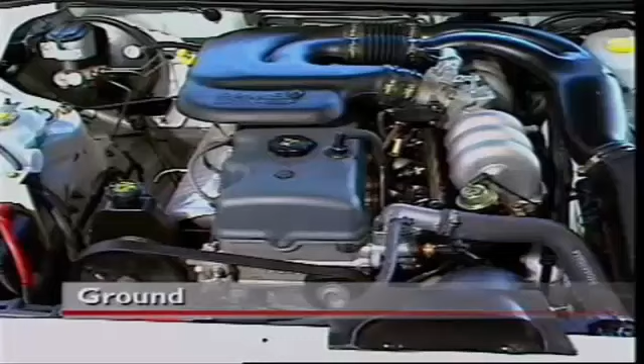Ground is a term used to indicate connecting a component to the vehicle frame or chassis. Current flows from the positive terminal of the battery through a controlling device such as a switch, then through the component. The return path is through the vehicle chassis or frame to complete the circuit and allow the component to operate. Using the vehicle frame in this way simplifies the circuit wiring.

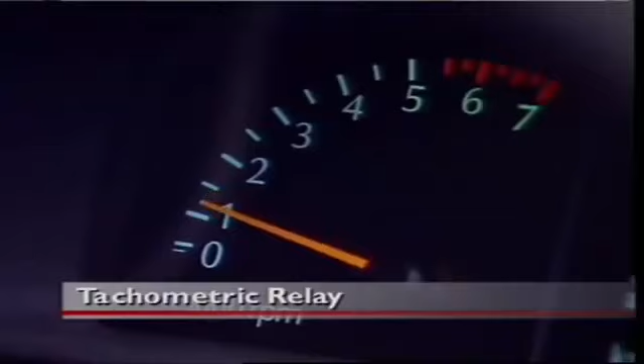A tachometer is used to indicate engine RPM. It is normally connected to the negative terminal of the ignition coil. The pulses from the ignition primary circuit are then used as an input to operate the tachometer. At idle speed, the frequency of the pulse is steady. As the engine speed rises, the frequency of the pulse increases as the tachometer indicates.

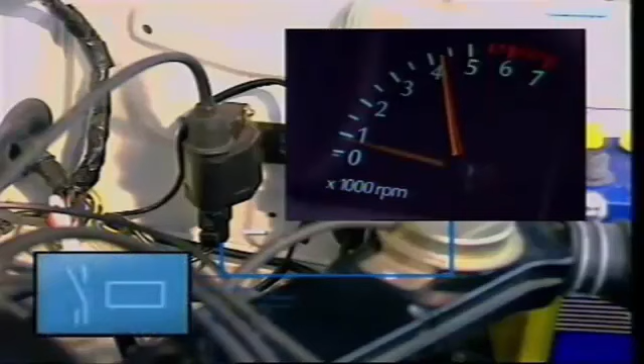A tachometric relay uses the same input from the negative side of the ignition coil to ensure the relay operates only when the engine speed is above a specified minimum, say 350 RPM. In this case, it operates as a safety device, ensuring the fuel pump operates only when the engine speed exceeds this figure.

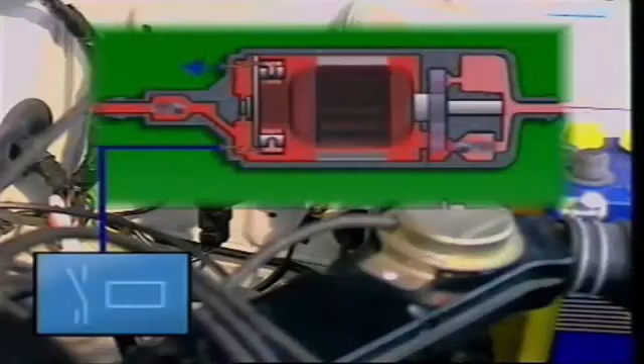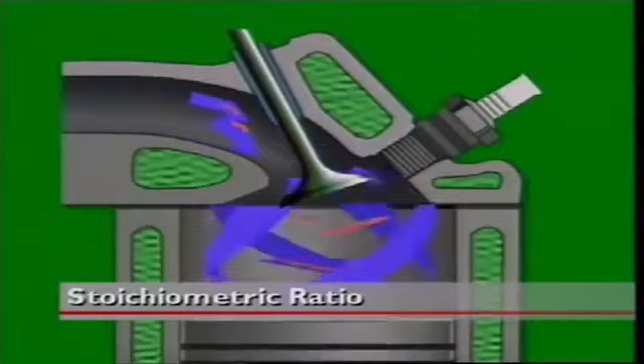The term stoichiometric ratio describes the chemically correct air-fuel ratio necessary to achieve complete combustion of the fuel. It is represented by the Greek letter lambda. The value of the ratio is 14.7 parts of air to 1 part of fuel. By mass, that's 14.7 kilograms of air to each kilogram of fuel. So if lambda equals 1, the air-fuel mixture is at the stoichiometric ratio of 14.7 to 1.

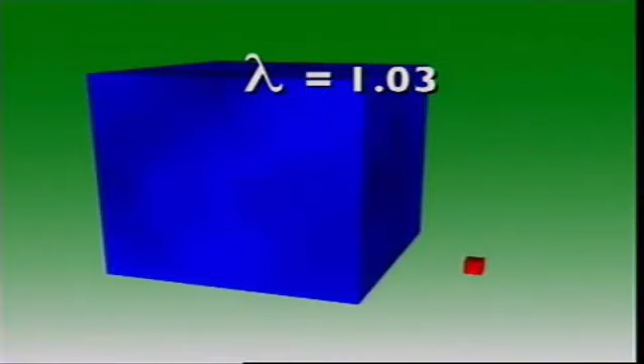If an air-fuel mixture has a higher figure, say 1.03, there is more air in proportion to the fuel than 14.7 to 1, and the mixture is slightly lean. A mixture with a lower lambda value has less air, proportionately, than fuel, and the mixture is slightly rich.

The exhaust gas oxygen sensor is also called the lambda sensor, since it can be used to maintain the air-fuel ratio at lambda equal to 1, within very close limits. It can be installed in the exhaust manifold, where it measures the percentage of oxygen in the exhaust gases. A high percentage of oxygen may mean too little fuel is entering the engine, the mixture is too lean, and the lambda is greater than 1. The sensor delivers this information to the ECU, which adjusts the mixture accordingly.

Similarly, a low percentage of oxygen may indicate too much fuel is entering the engine, the mixture is too rich, and the lambda is less than 1.

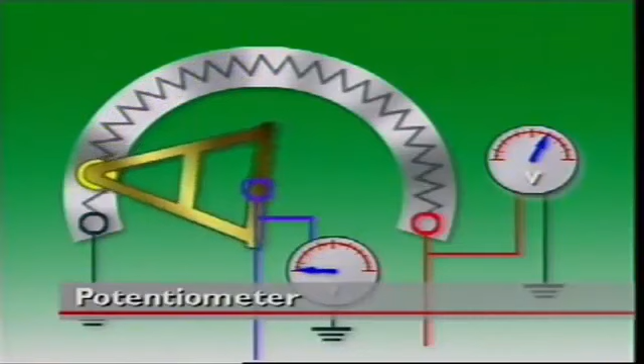A potentiometer is a mechanically variable resistor which, in EFI applications, is normally a film type. It can be linear or circular in construction and has 3 electrical connecting points. 2 are at the ends of the resistor and the third is attached to a center sliding contact, arranged to move across the resistor. A reference voltage is applied to the resistor so that a steady current flows through it.

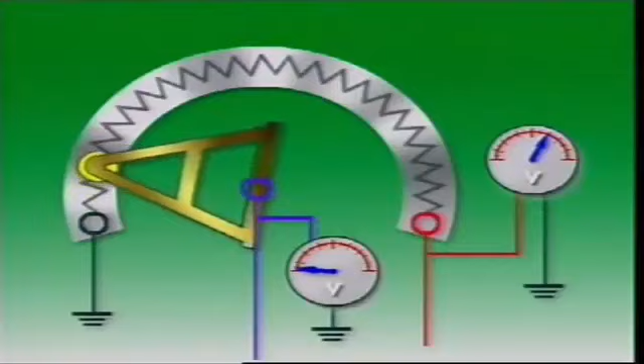As the center sliding contact moves across the resistor, it measures the voltage at the point it is in contact with, and provides a reference voltage for that position. In automotive applications, the circular form is commonly used as a throttle position sensor, with the center contact attached to the throttle plate. The throttle plate position can then be monitored by the control unit.

The density of air is its mass per unit volume. This means a volume of air at high density has a higher mass than the same volume at low density. And if there is a larger mass of air, it will contain proportionally more oxygen.

The density of air in the atmosphere changes at different temperatures and altitudes. That means the air that enters an engine at different locations could have very different amounts of oxygen. The amount of oxygen in air directly affects how well it supports combustion, so it can be important in determining an air-fuel ratio for an engine.

Pressure and vacuum are terms in everyday use in the automotive industry. Manufacturers recommend a pressure to which tyres need to be inflated, and manifold vacuum is used to operate a brake booster. Gases exert pressure on all bodies they make contact with. This applies also to the air in Earth's atmosphere. Air has mass, and as a result it exerts pressure, called atmospheric pressure, not only on the Earth's surface, but also on all objects on the Earth's surface.

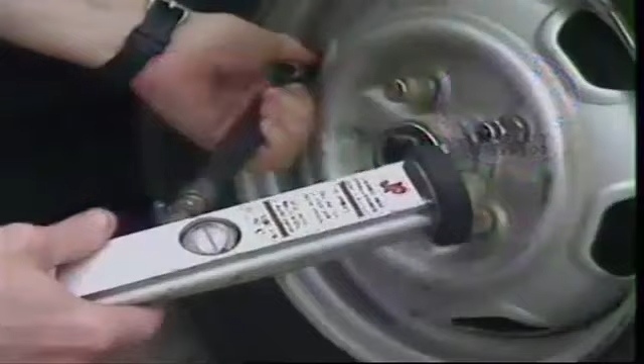If absolute pressure was needed, an absolute pressure gauge would be needed, and it would read 101.3 kilopascals when not in use. Absolute pressure equals gauge pressure plus atmospheric pressure. Readings on an oil pressure gauge or on a tyre gauge should really have 101.3 kilopascals added to them. It is normal practice, however, for the gauge reading alone to be taken as the accepted value.

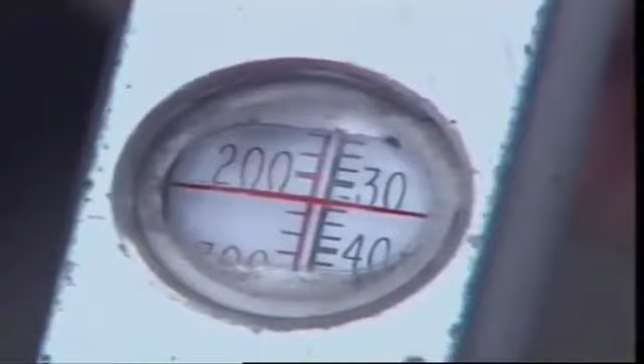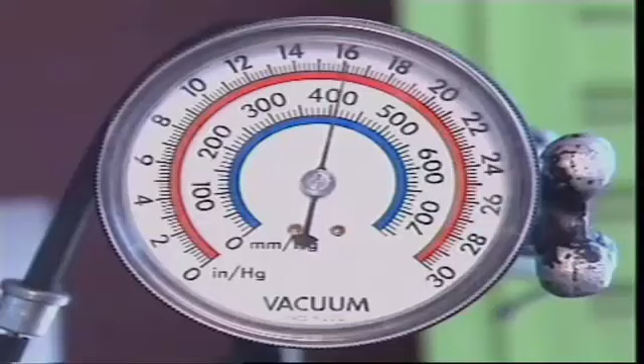If pressure being measured is below atmospheric, a pressure gauge with its 0 reading is of no value. This is why, for pressures below atmospheric, as in a manifold vacuum or depression, a vacuum gauge is normally used. In a petrol engine, the position of the throttle plate controls the volume of air, or air-fuel mixture, entering the manifold. At idle speed, the pistons draw air away from the manifold at a faster rate than it can pass the throttle plate into the manifold. A high vacuum, or a depression, exists.

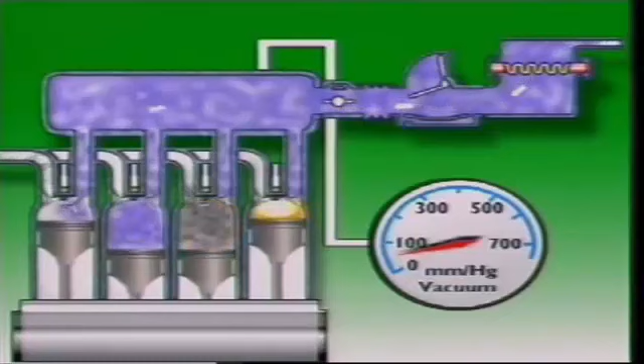At wide open throttle, depending on load, the vacuum is much less, and pressure in the manifold rises, closer to atmospheric. A vacuum gauge can be calibrated in millimeters of mercury, and the scale reads from 0 to 760. The scale is derived from the fact that atmospheric pressure supports a column of mercury 760 millimeters high.

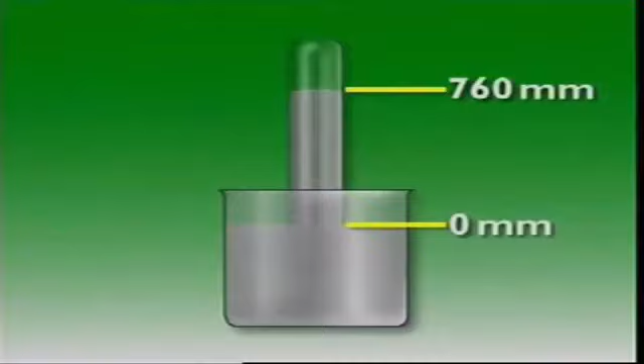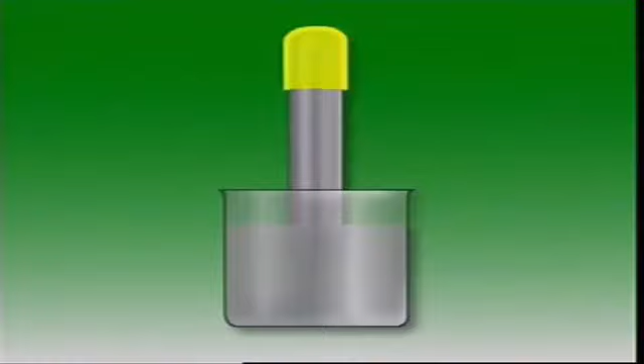This glass tube, closed at one end, is filled with mercury, then inverted in a bowl of mercury. The column of mercury in the tube falls to about 760 millimeters. The space above the mercury is a vacuum, and the atmospheric pressure on the exposed surface of the mercury supports the column. At sea level, atmospheric pressure supports a column of mercury 760 millimeters. But at higher altitude, its height falls, which indicates that atmospheric pressure at that altitude is less.

A scale of 0 to 760 millimeters can thus be used to indicate the degree of vacuum or depression that exists below atmospheric pressure. At idle speeds, a vacuum gauge connected to the intake manifold will indicate a reading of approximately 450 to 500 millimeters of mercury, depending on altitude. Some engine management systems signal changes in atmospheric pressure by using a barometric pressure sensor in the ECU. This is because, above sea level, air pressure is reduced. So to maintain correct air-fuel ratio, a vehicle has to reduce the amount of fuel delivered to the engine.

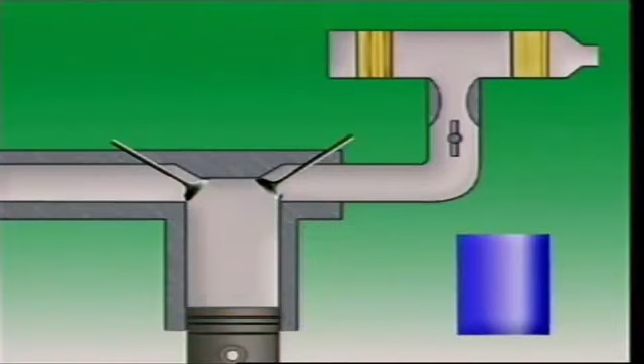Volumetric efficiency compares the volume of air entering a cylinder during intake to the internal volume of the cylinder when the piston is at bottom dead center. It is usually expressed as a percentage. In a naturally aspirated engine, one without forced induction, volumetric efficiency can never be 100%. This is because of the resistance to the airflow that occurs at the carburetor, manifold, and the intake valve.

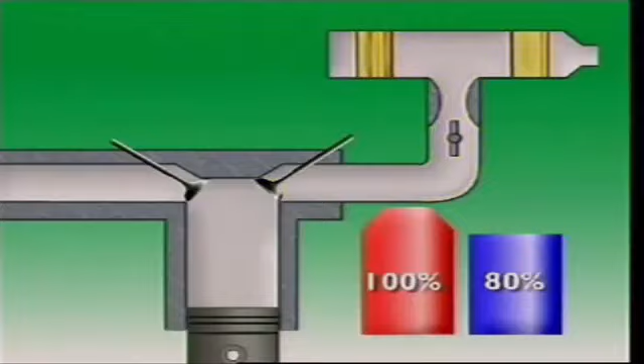With forced induction, the incoming air is compressed so that a greater volume and mass of air is forced into the cylinder during the intake stroke. That takes the volumetric efficiency to above 100%.

This section examines basic principles of electronic fuel injection. Because of the need to comply with exhaust emission regulations, the modern petrol engine requires a fuel system of extreme accuracy and long-term reliability. A correctly matched air-fuel ratio must be available at all times and under all conditions. This is satisfactorily achieved by electronic fuel injection.

EFI is a pressurized indirect injection system that uses solenoid-operated injectors with a fixed orifice. When they're energized, fuel passes through the injector body. This arrangement is called a multi-point system. One injector is located in each intake manifold runner or pipe adjacent to each cylinder. An electronic control unit, or ECU, opens the injectors by pulsing their electrical current. They spray fuel into each intake port directly in front of each intake valve.

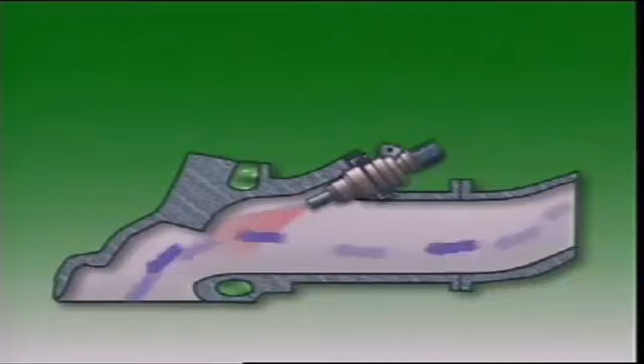Engine fuel requirements change according to engine speed, load, and temperature, so the ECU needs information on these changes. Sensors measure these variables, then relay the information to the ECU in the form of electrical signals. The ECU then calculates the duration of pulses necessary to provide the fuel required. Extra fuel required during cold starting can be supplied by increasing the number of injection pulses, or by fitting a separate cold start injector that operates independently of the main injectors when the engine is cranking.

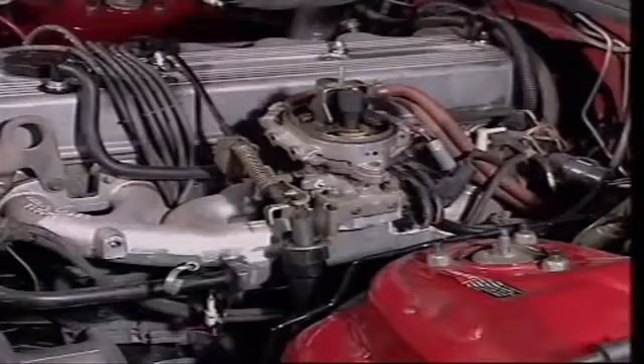The throttle body injection system, also called a central fuel injection system, has a single injector, or in some cases two injectors, mounted in a carburetor-like throttle body. The throttle body assembly is fitted to the flange of the intake manifold, and the fuel is sprayed into the intake air entering the manifold. The air-fuel mixture is then carried through the manifold into the engine. Fuel pressure is maintained at a constant value, and an ECU pulses the injector or injectors.

This section examines petrol fuel. Petroleum or crude oil is taken out of the ground as a mix of impurities and highly flammable compounds of hydrogen and carbon, called hydrocarbons. It is processed into many products, including petrol and diesel fuel.

Petrol is used in different forms in different engines. It is very volatile, mixing easily with air to form gas or vapor. The more effectively liquid petrol is changed into vapor, the more efficiently it burns in the engine, so high volatility is desirable.

How petrol burns must be controlled. If it burns too quickly, it can cause detonation, sometimes called ping or knock. So special additives are used to slow down the rate of combustion. Octane rating is a measure of how well a petrol resists detonation. The higher the rating, the less likely it is that detonation will occur.

Higher operating pressures in the combustion chamber can also cause abnormal combustion. A lead-based anti-knock additive used in leaded petrol can allow these higher pressures without loss of performance. Lead additives are also lubricants. In high compression engines, lead compounds coat valve faces and seats and help prevent wear.

Leaded petrol is used in older cars that have few or no emission controls. It should never be used in engines designed for unleaded fuel. Governments now limit levels of lead in petrol, and unleaded petrol is replacing leaded petrol. So-called unleaded petrol may contain small amounts of lead, but maximum levels are tightly controlled.

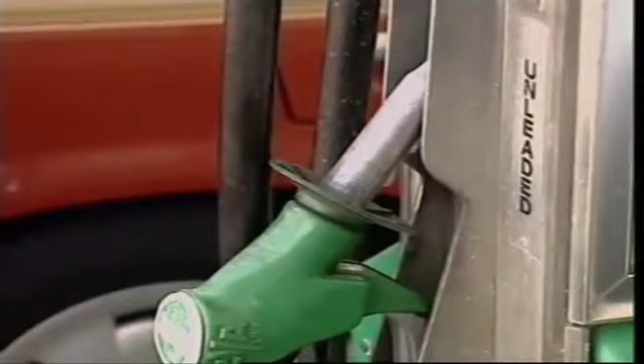For petrol to burn properly, it must be mixed with the right amount of air. For a petrol engine, the air-fuel ratio by mass is about 15 to 1. By volume, it's about 11,000 to 1. Not much petrol, but lots of air.

A lean air-fuel mixture has more air in proportion to the amount of fuel. A slightly lean mixture gives good fuel economy and low exhaust emissions, suitable for cruising conditions. A mixture that's too lean can make an engine run roughly and overheat.

A rich air-fuel mixture has less air in proportion to the amount of fuel. A slightly rich mixture can produce more power at lower temperatures, but the extra fuel it uses steps up fuel consumption and emissions. A too rich mixture fouls spark plugs and causes incomplete burning, and that reduces power.

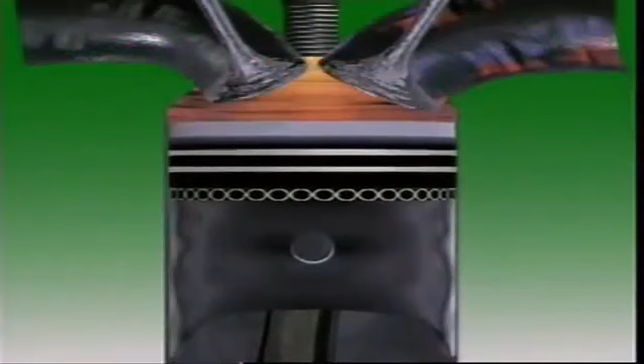In normal combustion, the spark plug ignites the mixture and a small ball of flame forms around the tip of the plug. The piston compresses the mixture, the flame spreads faster and moves evenly to halfway through the mixture. The piston reaches top dead center. The flame picks up more speed, then shoots out to consume the rest of the mixture. Combustion ends with the piston a short way down the cylinder.

Detonation is a violent collision of flame fronts in the cylinder caused by uncontrolled combustion. It occurs after the spark plug has fired. The sudden rise in pressure can cause a knocking sound. Sustained detonations can lift temperatures enough to cause pre-ignition, also called auto-ignition.

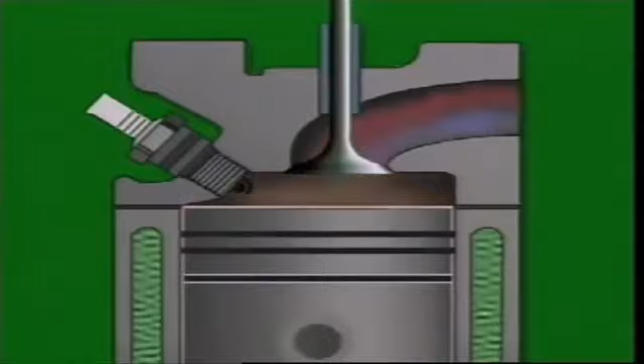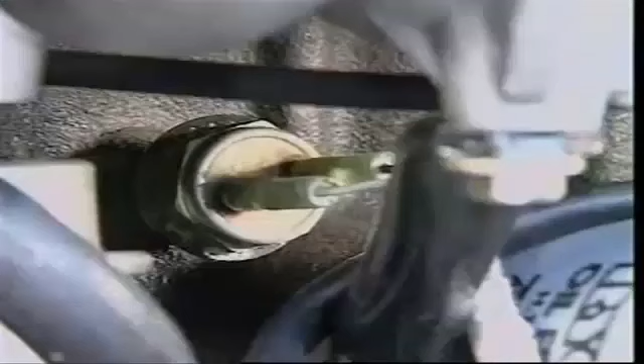Pre-ignition occurs before normal combustion, when something in the combustion chamber heats up enough to ignite the mixture before the spark plug fires. A mixture may also ignite simply because it is unstable under the higher heat and pressure. Detonation and pre-ignition can cause severe damage and must be avoided. Engine management systems use knock sensors to detect detonation, and they retard ignition to stop it.

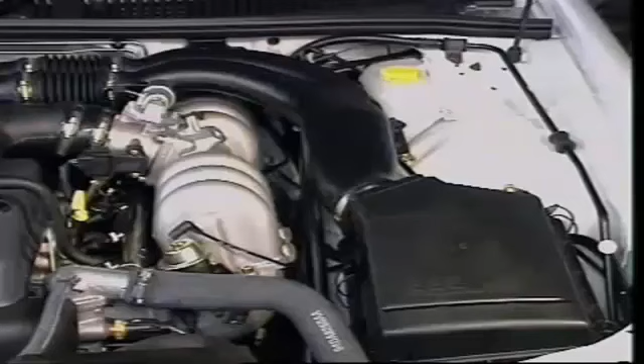This section examines the air supply. In multi-point injection systems, the air required for the combustion of the fuel is led from the air filter through the throttle valve and into the common manifold or plenum chamber. From here, individual intake runners or pipes branch off to each cylinder. All of these pipes are of equal length.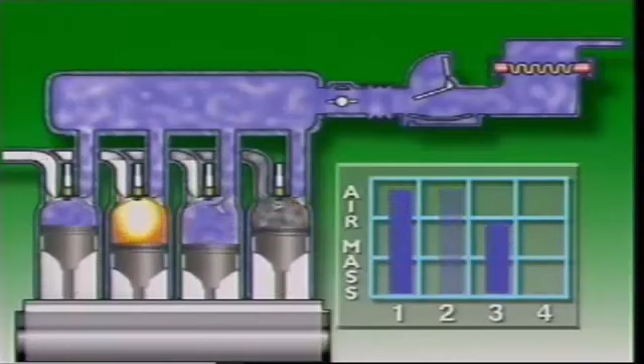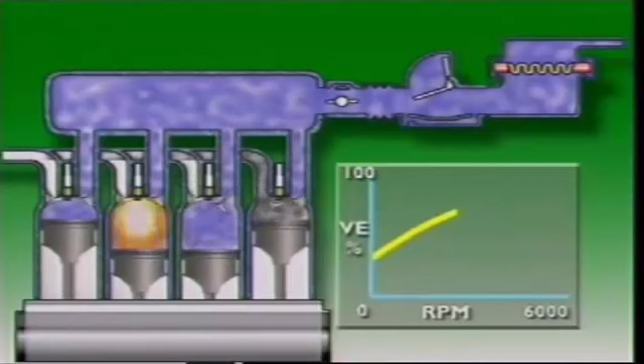The design of the intake system determines how large an air mass can be drawn into a cylinder at any given engine RPM. This is where most advantage can be taken of electronic fuel injection, since it can achieve exactly uniform distribution of the air delivered to the cylinders. With unobstructed passages to each cylinder, the cylinder fills with air as efficiently as possible. The breathing of the engine, or its volumetric efficiency, is improved.

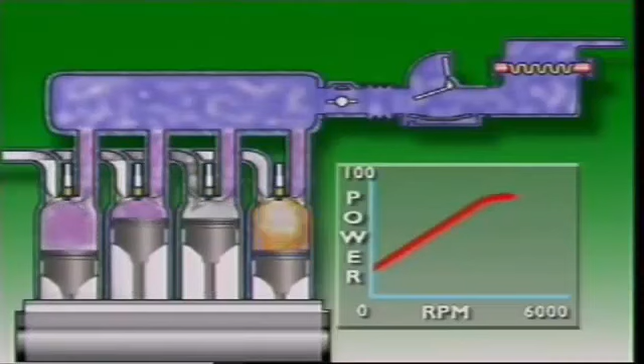The more air crammed into the cylinder, the denser the air-fuel mixture when ignition occurs. This increases the thrust on the piston and increases engine power output too. The temperature of the air influences how dense the air-fuel mixture will be. Cold air is denser than hot air, so it has a greater mass in any given volume.

This is why on most intake systems the air entry to the intake is away from engine heat, to ensure the entry of cool air. Since the manifold carries air only, it doesn't need to be heated by coolant. Filtered air arrives at the intake port as cold and dense as possible, ready for mixing with the fuel from the injector.

The amount of air entering the engine must be measured, so that the amount of fuel injected into it forms a mixture to suit the engine operating conditions at that time. The volume of air entering the engine varies according to the position of the accelerator pedal and the engine speed and load. Changes in volume are reflected in changes in manifold pressure between the throttle plate and the intake ports.

When the pistons draw air away from the manifold more quickly than air can pass the throttle plate into it, the pressure in the manifold falls. At idle speeds, this pressure is low. A high depression or a vacuum exists. As the throttle plate opens, the pressure approaches that of the atmosphere. The depression or vacuum tends to fall in value.

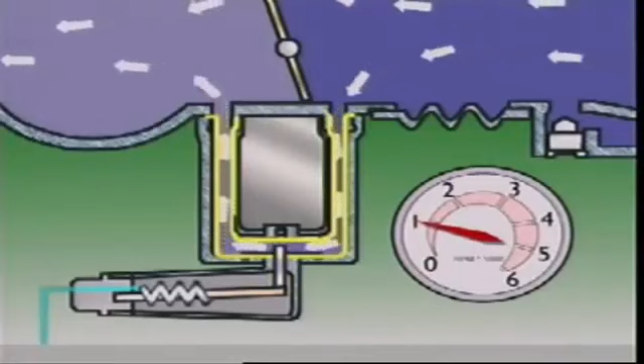Variations in air density, according to temperature, are measured by the air intake temperature sensor. It's installed in the main passageway protruding into the airstream. During cold starting, the engine needs extra fuel and extra air also to provide a suitable mixture and increase idle speed. When the engine is cold, an auxiliary air valve lets air bypass the throttle plate. As the engine warms up, the valve gradually closes. This keeps idle speed fairly close to the basic setting of the idle speed adjusting screw, which is on the throttle body.

Another method uses an idle speed control valve with the bypass passageway controlled by the ECU. The passageway is varied for cold starting and if the engine has extra loads, such as headlights or air conditioning. A predetermined programmed idle speed can thus be maintained.

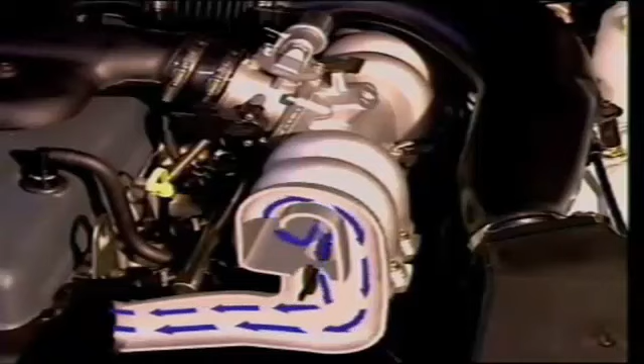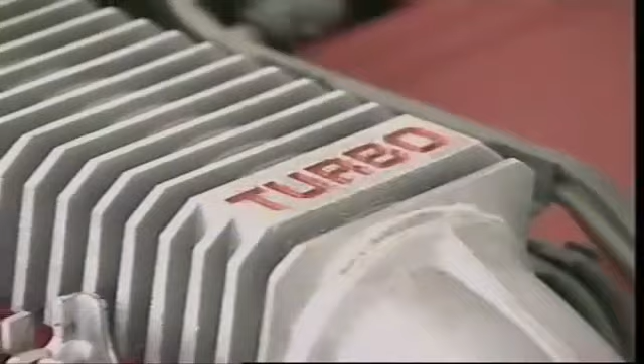Variable inertia manifolds can vary the effective manifold length in 2 or 3 stages to extend the torque curve over a wider RPM range. Generally, long intake pipes improve cylinder filling and therefore engine torque at lower engine RPM. Shorter pipes improve cylinder filling at higher RPM. Cylinder filling can also be improved by using engine-driven supercharging and by turbocharging.

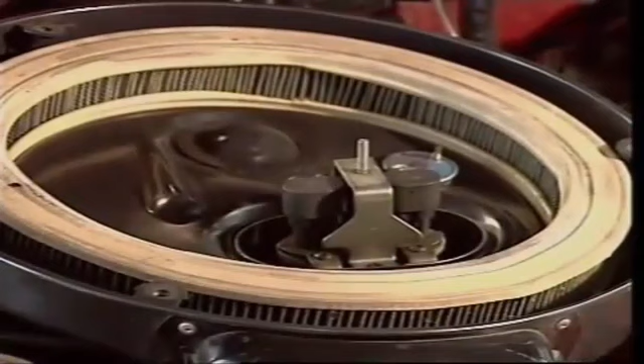In throttle body systems, the air supply is led from the air filter into the central throttle body system. Here the air mixes with the fuel from the injector or injectors, and the mixture is carried through the manifold pipes into the cylinders. Manifold design, however, is usually a compromise in order to keep the mixture vaporized. Heating the manifold by engine coolant is necessary, and the pipes tend to be smaller in cross-sectional area. This tends to limit the advantages of EFI compared to a carbureted system, but useful gains can still be achieved in power and in reduced emissions.

As in a multi-point system, air entering the engine must be measured. This, together with the engine speed signal, provides the ECU with the basic information needed to determine the pulse width of the injector.

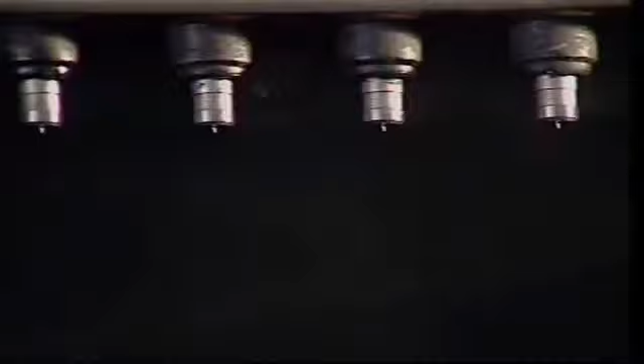This section examines the fuel supply system. The purpose of any fuel supply system is to deliver fuel to the engine in a form in which it can mix with air to form a combustible mixture. The fuel must be finely atomized to mix with the air. This is why injection systems deliver the fuel under pressure. The EFI system is a circulation system. Fuel is drawn from the tank by a fuel pump and delivered to solenoid-operated injection valves.

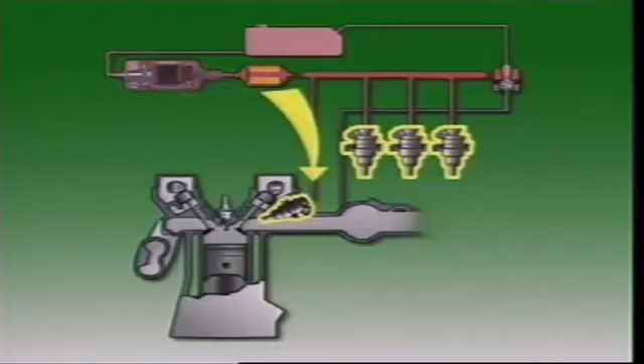Fuel pressure at the valves is maintained by a fuel pressure regulator, and excess fuel flows back to the tank through a return line. The fuel filter is directional. It is fitted between the pump and injection valves to stop contaminants reaching other parts of the system.

The fuel pump can be mounted externally on the chassis frame or submerged in the fuel in the tank. It is electrically operated and electronically controlled. It is driven by a permanent magnet electric motor, a sealed unit integral with the pump. Fuel flows through the pump and around the electric motor when it is running. There is never an ignitable mixture inside the pump housing, so there is no danger of explosion.

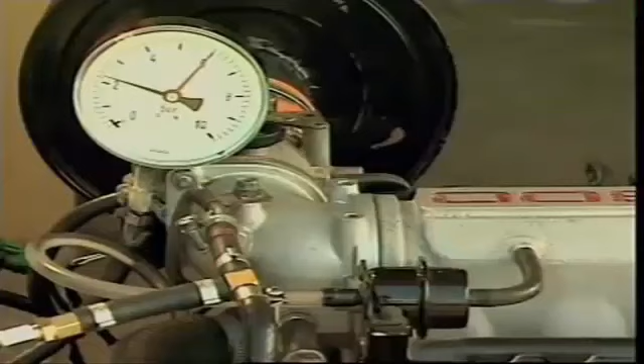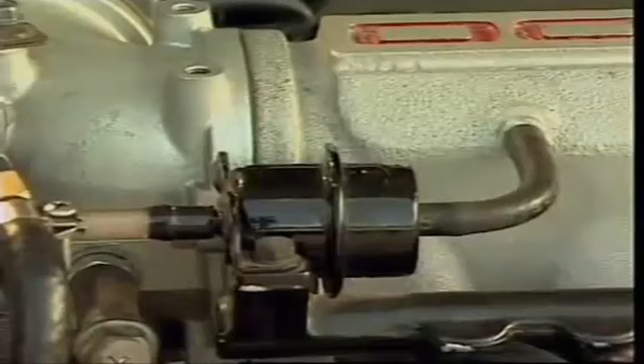The pump delivers more fuel than the maximum requirement of the engine, so pressure in the fuel circulation system is maintained at all times. A fuel pressure regulator maintains fuel pressure between the pump and the injectors. In multi-point injection systems, the fuel pressure regulator has an inlet connection from the fuel rail and an outlet that lets fuel return to the tank.

A control diaphragm and pressure spring determine the exposed opening of the outlet and the amount of fuel that can return. So the strength of the pressure spring determines fuel pressure in the fuel rail and keeps it at a fixed value. However, the pressure in the intake manifold varies considerably with changes in engine speed and with load, so the pressure drop across the injector must also be taken into account.

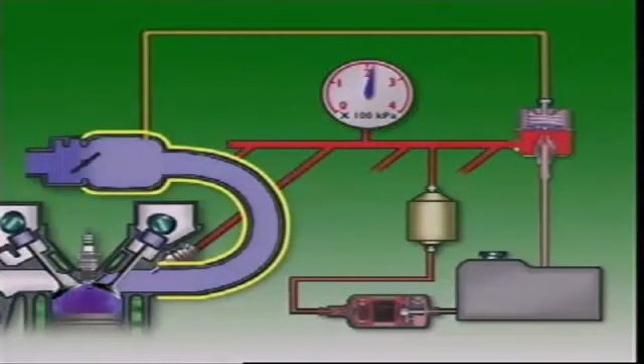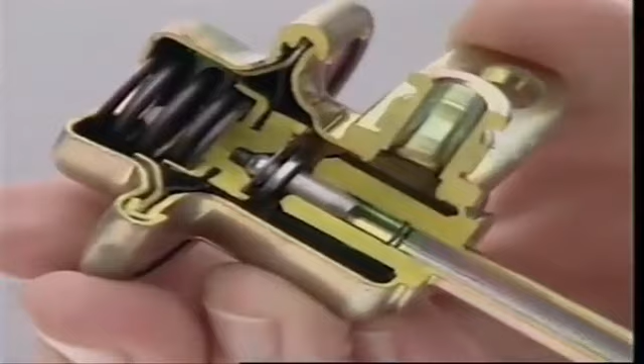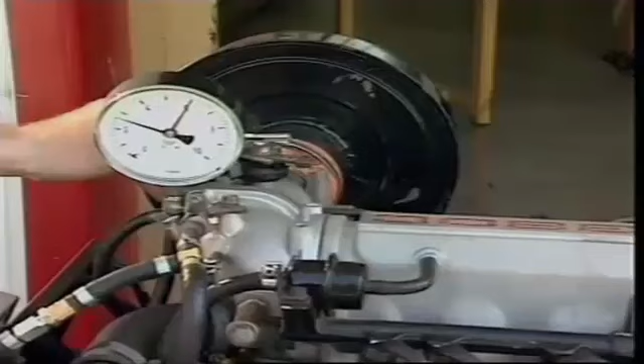For any injection duration, if fuel is held at constant pressure, then as manifold pressure varies, so does the amount of fuel delivered. That means fuel pressure must be held constant above manifold pressure. This is done by sealing the spring housing of the pressure regulator and letting it sense manifold pressure via a connecting hose. Then, when the manifold pressure alters, so does the fuel pressure. When manifold pressure is low, as at idling, fuel pressure is low. As manifold pressure rises towards open throttle, so does fuel pressure.

Since the injectors are all subjected to the same pressure, they all inject an equal amount of fuel. The quantity of fuel delivered is thus controlled very accurately by the pulse width of the injector. Manifold pressure sensing is not required in throttle body systems, as the injection occurs above the throttle plate at atmospheric pressure. So fuel pressure is determined by the force of the regulator spring acting on the diaphragm.

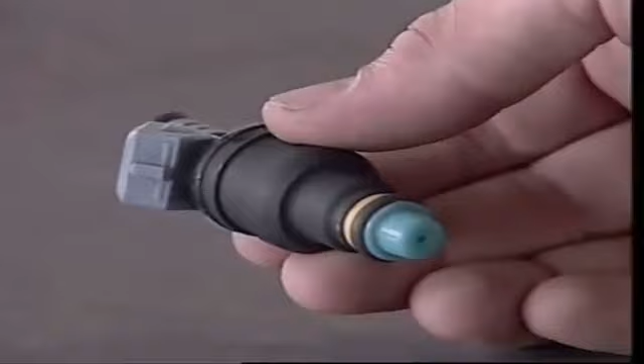The injectors are sealed into the manifold by O-rings that prevent air entering at that point. The O-rings, together with plastic caps on the injector nozzles, also act as a barrier to heat being transferred to the injector body. For a short time after an engine is switched off, engine temperature keeps rising, and that can cause excessive vapor in the fuel lines. This pump stops this with a non-return valve on its outlet, which maintains the pressure in the fuel line during that short time. This pressure will decay over about 20 to 30 minutes, but it ensures effective hot starting characteristics.

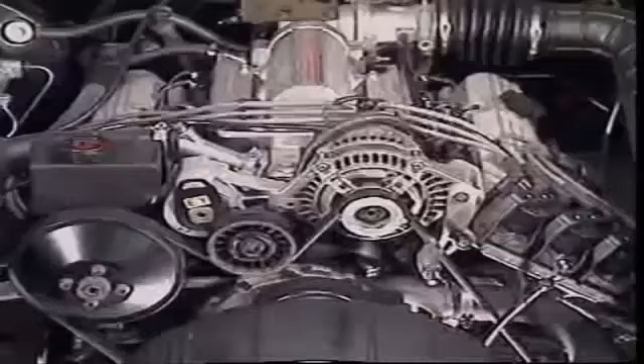When the engine is running, the circulation of fuel ensures cool fuel is being delivered at all times, and vapor formation is prevented. The pump control circuit normally allows the pump to operate for a few seconds only when the ignition is switched on, and thereafter during cranking, and when the engine is running above a specified minimum RPM.

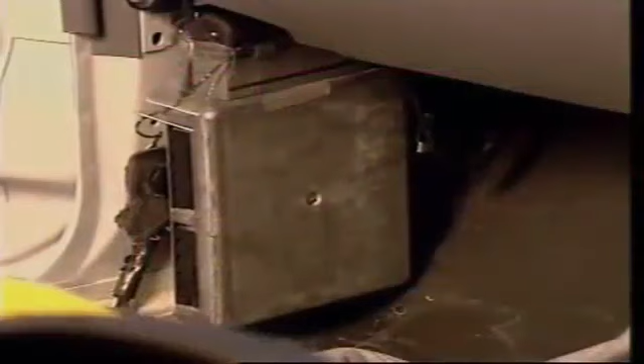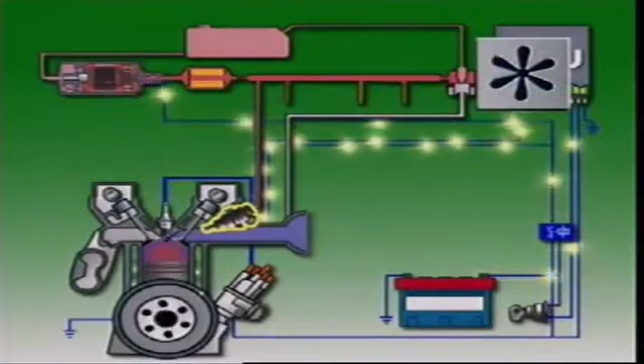This section examines electrical functions in EFI. In the electrical system, detecting elements sense engine operating conditions and relay this information in the form of electrical signals to the electronic control unit, or ECU. The ECU is a small computer programmed with the operating characteristics of each individual application. This information is stored in its memory. The control unit processes input signals to determine the amount of fuel required by the engine at that instant. It then grounds the injection valve circuit to open the solenoid-operated injection valves. The length of time injectors stay open in milliseconds determines how much fuel is injected.

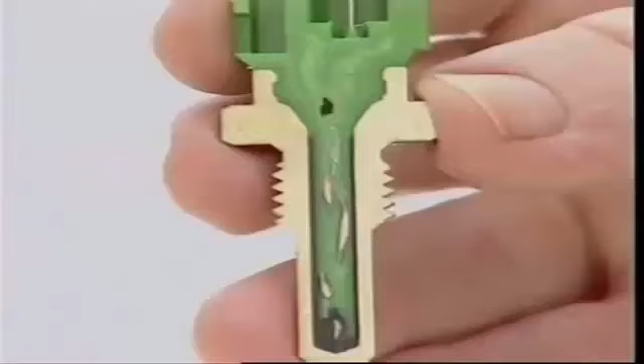A basic EFI system needs input signals on ignition switch operation, engine cranking, the amount of air entering the engine, coolant temperature, throttle position and engine speed, and battery voltage. The varying data received from all of these inputs allows the ECU to arrive at its injection setting.

This vehicle began from a cold start and has been running only a short time. It is now operating in top gear with a light throttle only. What influences its fuel requirements? A relatively small volume of air is entering the engine. The throttle position is associated with economy or cruising conditions. Engine speed is in the low to mid-range. Coolant temperature is still below normal.

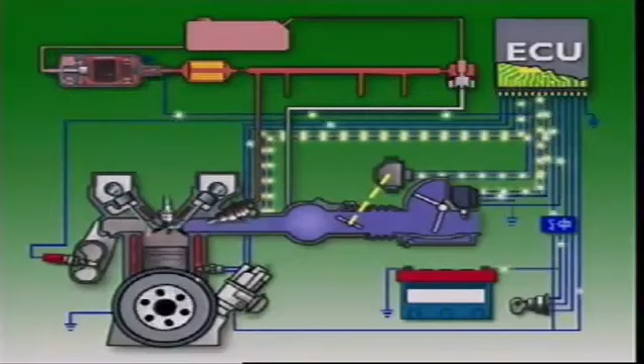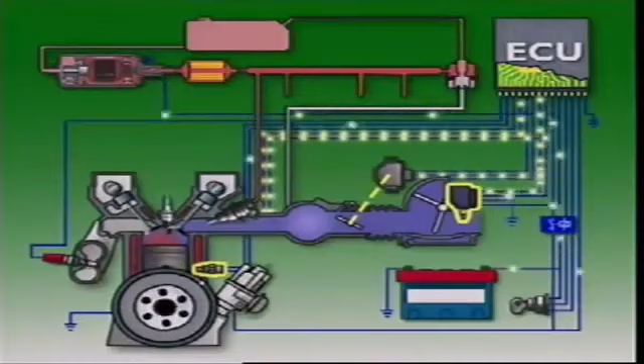These factors combined produce a fuel setting. It is less than if the throttle were opened suddenly for acceleration or to overcome increased load. However, it is more than it would be if coolant temperature were at its normal level. The varying signals can be supplied by variable resistors, by switch contacts, by voltage pulses from the ignition system, or by sensors.

An airflow meter varies its signal by the deflection of a vane as air enters the engine. Deflecting the vane moves contacts across a potentiometer to signal its position and thus the amount of air entering the system.

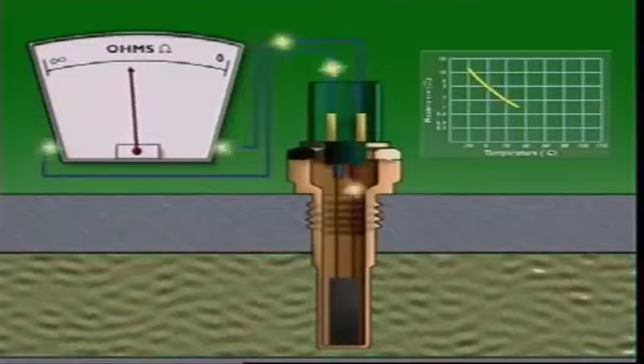The temperature sensor uses material with a negative temperature coefficient of resistance. Its resistance is high when it's cold, but it falls as its temperature rises. It's called a thermistor. This is the opposite of a normal resistor, which increases its resistance as temperature rises.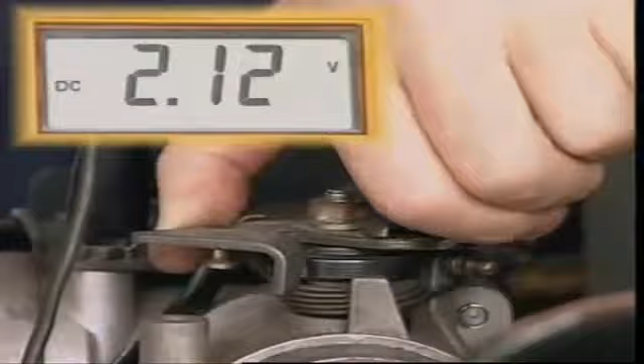The coolant temperature sensor is immersed in coolant in the cylinder head. The air temperature sensor is in the air intake at the airflow meter or in the manifold. Throttle position can be signaled by a potentiometer attached to the throttle shaft. It provides a continuous varying signal through the entire range of throttle position.

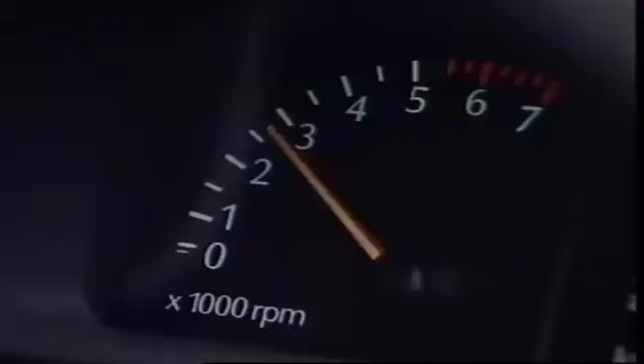Throttle position can also be signaled by a contact type switch, but it signals the idle and fully open positions only. Engine speed can be detected by a connection from the ignition system primary circuit or by a pulse generator type sensor on the crankshaft. The pulses are computed by the control unit into an engine RPM figure. They can also be used to trigger the injectors.

In multi-point injection, the injectors can all be triggered at the same time. This is called simultaneous injection, and the injectors operate twice per cycle. That's once each crankshaft revolution, each time delivering half the fuel for the cycle. In a six-cylinder engine, the injectors are triggered on every third ignition pulse.

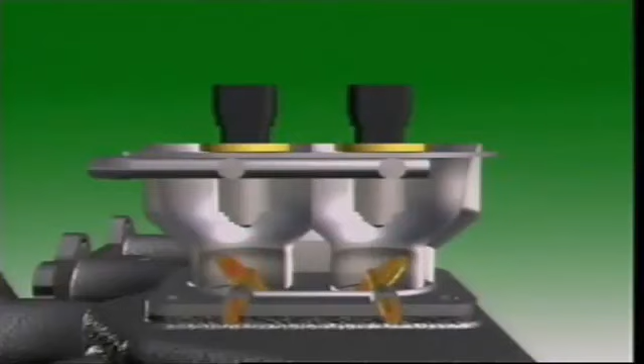In throttle body systems, the central injector is normally triggered on every ignition pulse. However, if there are two injectors, alternate triggering may be used. At idling speeds, the frequency may be less to provide finer control.

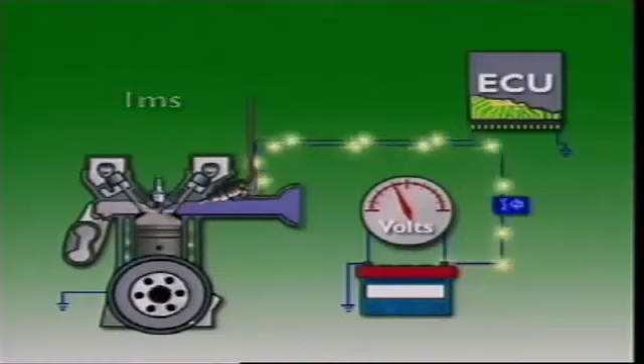The actual operating time of the injectors depends very much on battery voltage. The response time to lift the injector needle to the fully open position is about 1 millisecond. If battery voltage is low, this response time takes longer and the engine receives less fuel. The ECU can compensate for this delay in opening time by extending the duration of the injection pulse.

In more sophisticated engine management systems, the control unit can control additional functions, such as ignition timing, injection modes, idle speed, cooling fans, and fuel pump operation. To do this, however, more inputs are needed.

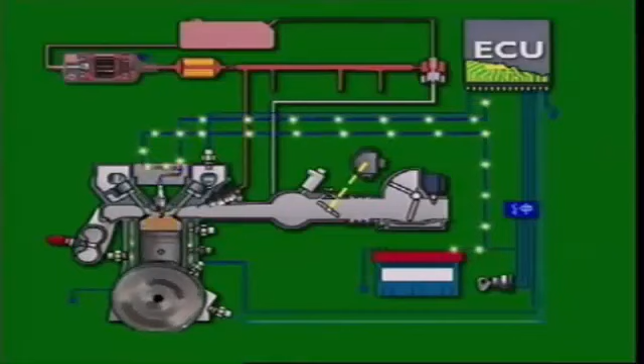To control ignition timing, some systems replace the distributor with a direct fire ignition system. Between one ignition point and the next, the ECU calculates when the ignition point will occur. It then triggers the ignition accordingly. Ignition can be varied according to load, speed, coolant temperature, cranking speed, and battery voltage.

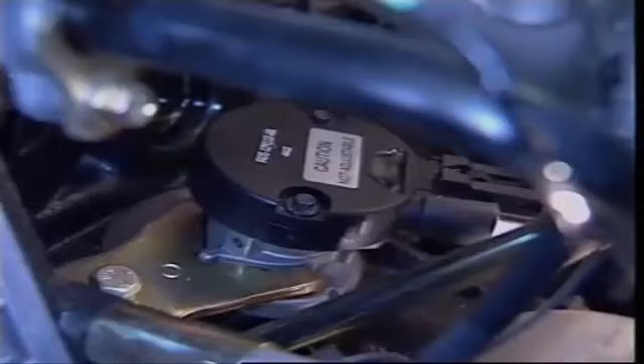Identifying number 1 cylinder and the camshaft position allows different injection modes to be used. Sequential injection means injection occurs in the sequence of the firing order. Each injector opens once only in each cycle to deliver the fuel needed.

Added load placed on the engine during idle can be compensated for by increasing the passageway of an idle speed control device. This lets more air bypass the throttle plate. This air has been measured by the airflow meter, so extra fuel is metered to maintain the same air-fuel ratio. The extra mixture thus delivered increases engine torque and maintains idle speed.

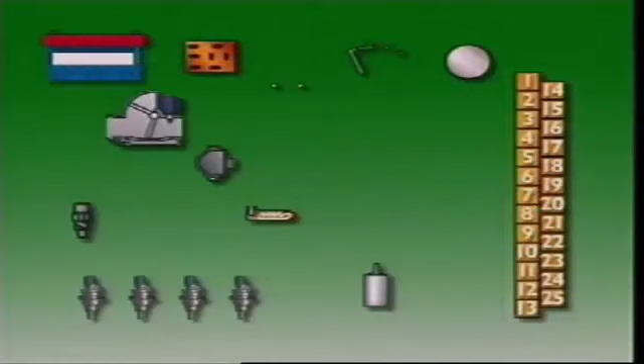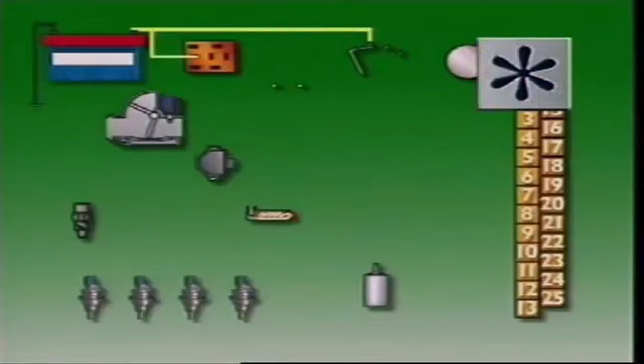This is a simplified wiring diagram for an EFI application. The battery is grounded to the vehicle frame at the negative terminal. Its positive terminal is connected to a tachometric relay and to the ignition switch. A connecting wire runs from the tachometric relay to the positive terminal on the fuel pump. A fuse in the connecting wire protects the circuit.

The fuel pump circuit is completed by grounding the fuel pump negative terminal to the frame of the vehicle. When the fuel pump operates, current flows from the battery to the pump. It flows through the pump to rotate the armature and completes the circuit by flowing from the negative terminal through the vehicle frame to the battery negative terminal.

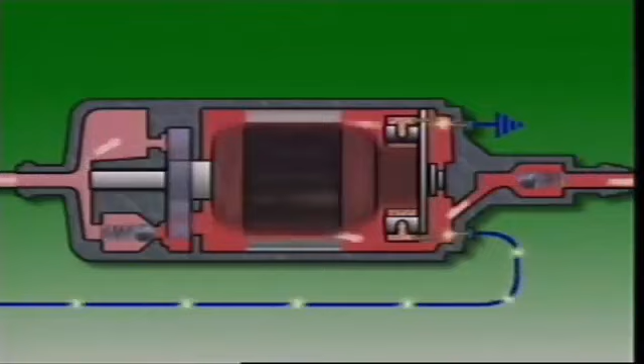Similarly for the other components in this simplified system. Positive connections are made to a number of components from the tachometric relay. The relay only operates when the engine is cranking or running, so no current flows in any connecting wires at other times.

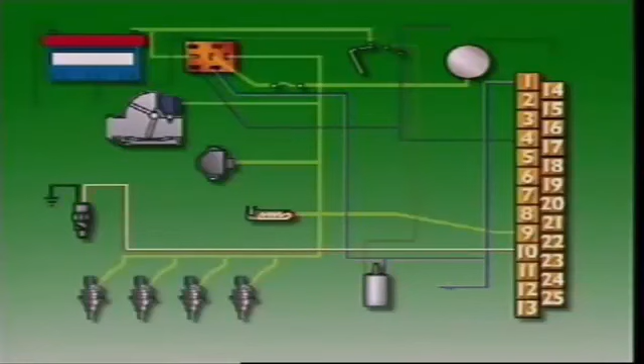Identification of the sensors and their inputs allows easier identification of the wiring diagram for any given system. Follow the circuit for each component from the battery positive terminal and trace its path back to the negative terminal. Components are earthed either through the vehicle frame or the ECU.

The other EFI discs in this series examine in more detail some more sophisticated engine management systems and the operation of their components. You should view these other discs. Then investigate these more complex systems for yourself.